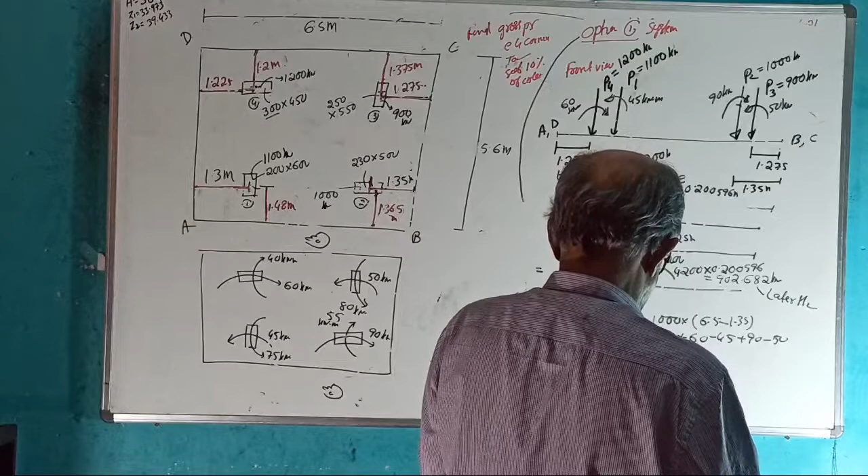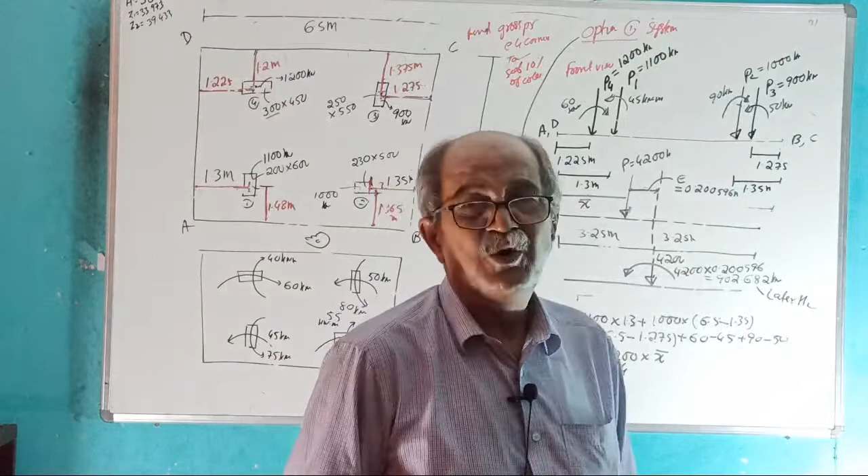Today, see, once again, same as yesterday. It was 100% charge at 5 o'clock. So, 100% means more heating was there, so I removed the charger. I thought around 7:30 I will put it on charging again. But what happened is, in the class, I forgot it. This is my mistake only. Next time I will be careful. For long classes, you once again remind me at around 7:30 or 8 o'clock. Just a comment, charging.

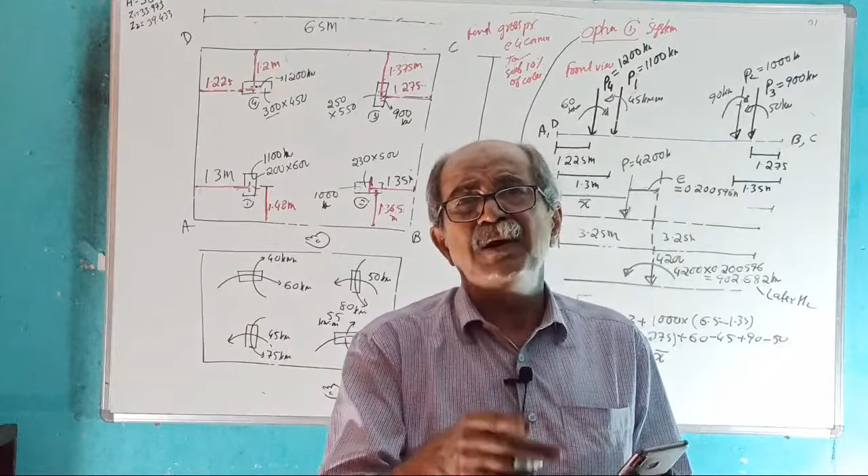For 2 hour classes, if 100 is there, no problem. This 4.5 hour class, usually after 2.5 or 3 hours, it becomes completely gone. Even I got frustrated today. Today's class I wanted in a single compact manner. Now broken. Those who are serious, they will see. Those who want gimmicks or show off, let them not see. No problem. Now continue.

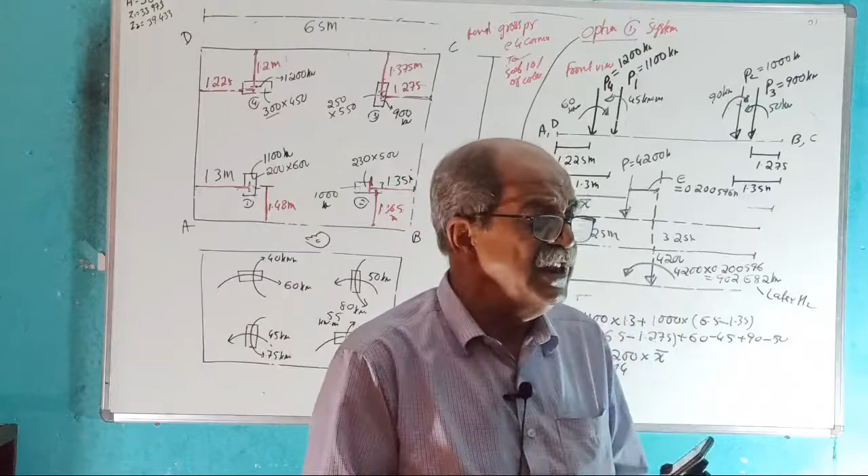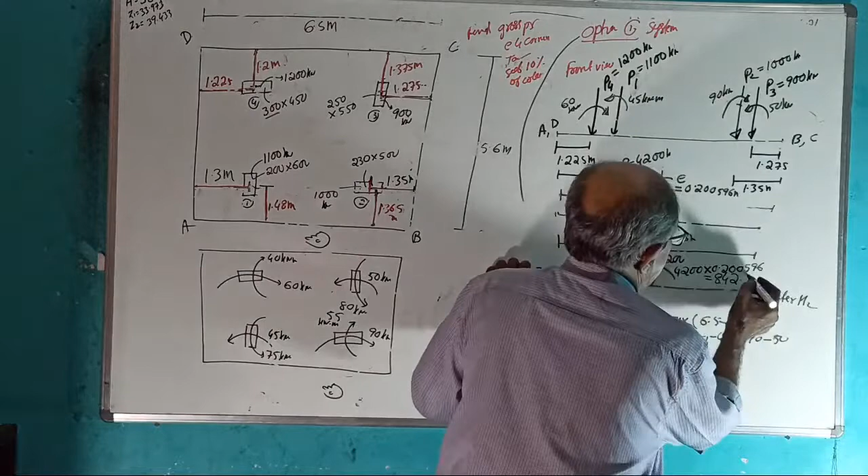So that number is, how you told wrong answer? No. It is how much? It is 842 point how much? 5032. Okay. 5032 is the answer. Later, M2. Fully clear? Fast. Is this fully clear? Fast, tell me.

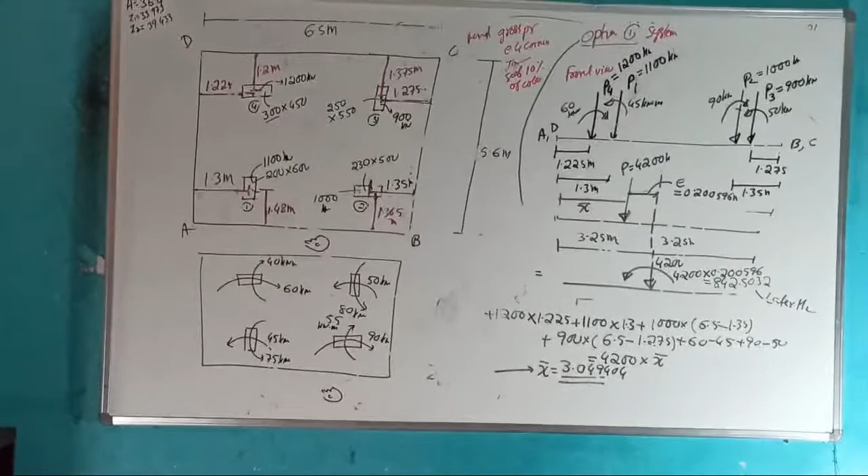Mic is off. Oh, yes. I have not plugged in the mic. Okay, no problem. I will put it. Sometimes it happens when you take the class, if you are serious about the subject. These things will not happen for a person who just takes classes mechanically. Those who are seriously involved in teaching, such things happen. Now, voice also okay now? Next time I will be careful. Now, mic is okay, voice is okay.

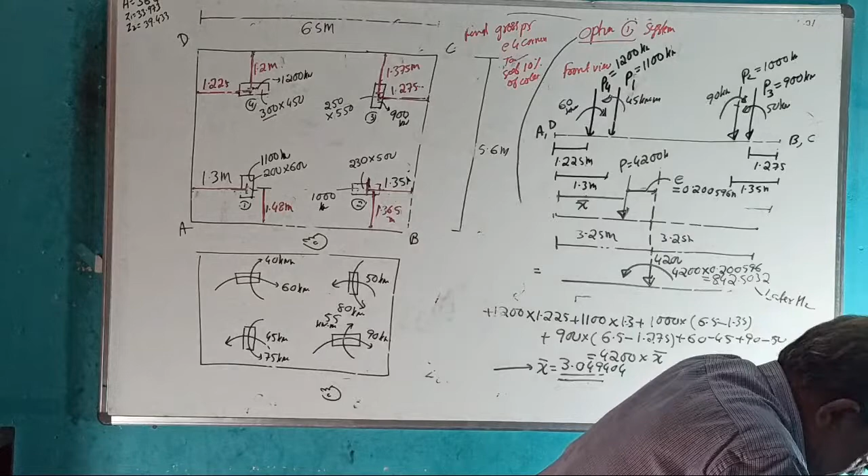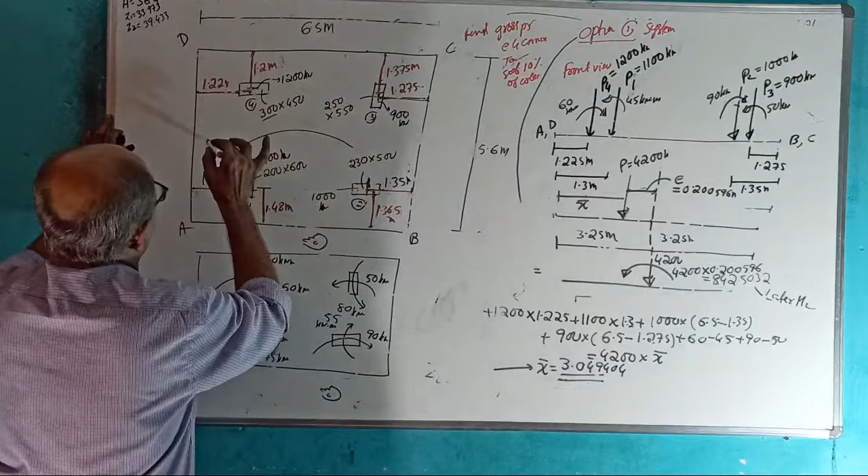Okay, start. Is this number correct now? Fast. I am rubbing this one now. Is that number 842.5032 correct? Okay, therefore remember, this M2 value is anti-clockwise 842.5032. Now option 1 is over. I will go to option 2 for lengthwise. Widthwise you try today. Today class will take a little more time. You should try and tell the answer. Those who are serious will try.

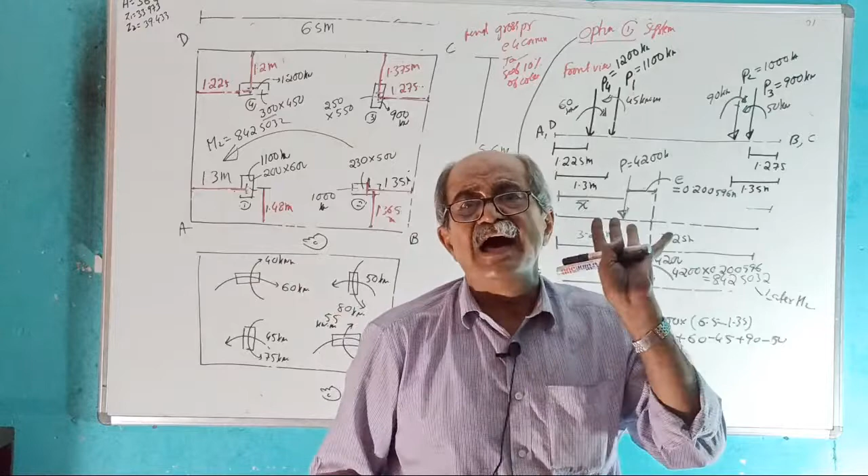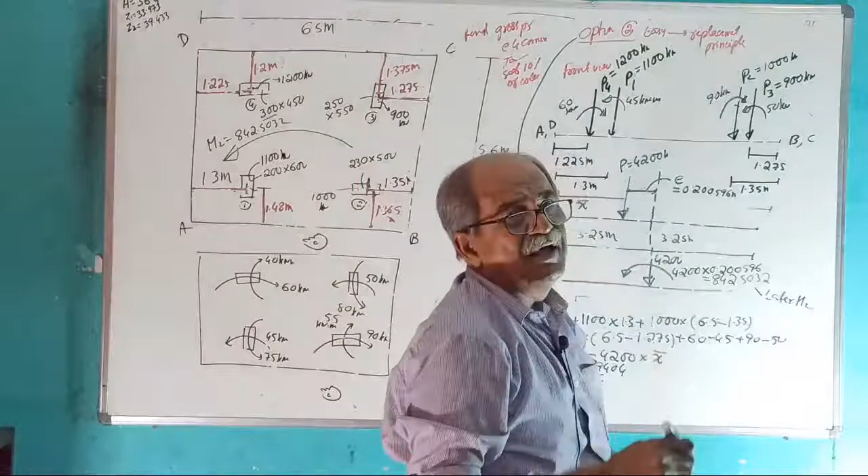Now, option 2. Option 1 is systematic; option 2 is very easy. Remember, option 2 is the replacement principle. Clear or not? For option 2 also the same sketch is required. You don't find X bar in option 2, nothing like that. In option 2, you first mark the same system, see from this side and write everything. This is the centroidal axis.

Now, replace this complete force system by a force P, and the moment we don't know, assume clockwise, moment M. Now it is called M, but later when you go to the footing pressure calculation, this M becomes M1 or M2. Directly all these black values are replaced by a single force P and M.

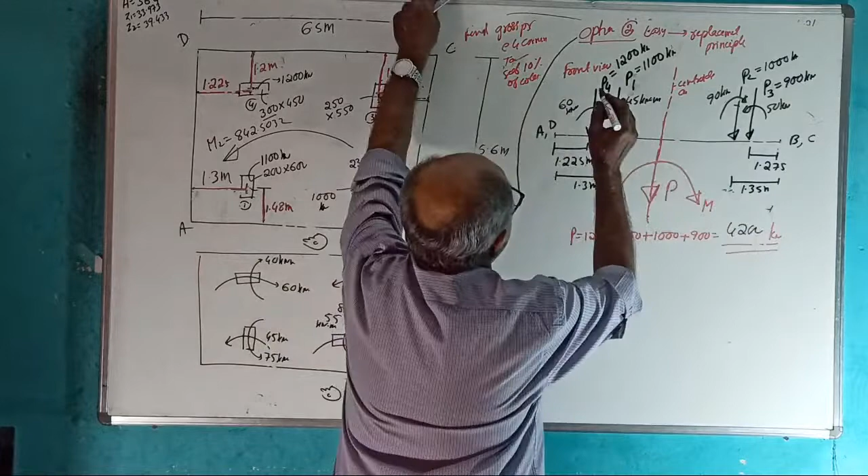Directly P equal to 1200 plus 1100 plus 1000 plus 900. Add all the loads, you get the total downward load, P equal to 4200. Now, each load is shifted here with the load and moment, or you find the moment of the complete system about this point. So, M is the algebraic sum of moments of the given force system about the centroidal axis. We will take clockwise positive.

M equal to 1200 into, before that, write what is this distance. If total length is 6.5 meter, half of length is 3.25 meter. Lengthwise I am doing. Widthwise I will take rest, but I will not stop the class. I will put the sketch and give around 10 minutes for you to do by both options. Now, moment about this point.

1200 into 3.25 minus 1.225, this load into this distance. It is anti-clockwise, so minus. Again, 1100 into 3.25 minus 1.3, also anti-clockwise. Then plus 1000 into 3.25 minus 1.35, that is clockwise. Again clockwise, 900 into 3.25 minus 1.275. These are the moments of the four loads when transferred to CG. Then directly plus 60, minus 45, plus 90, minus 50 will give the net answer.

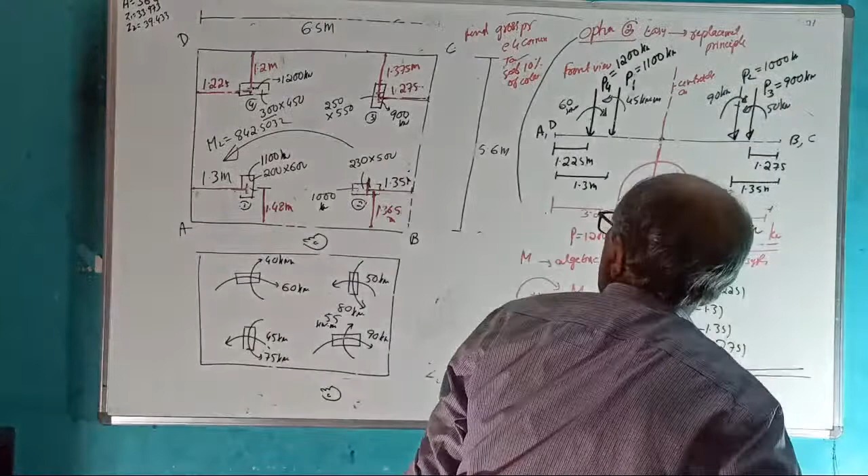Tell the answer. You have to get 842.5032. 1 paisa, 2 paisa difference, no problem, because of rounding off error.

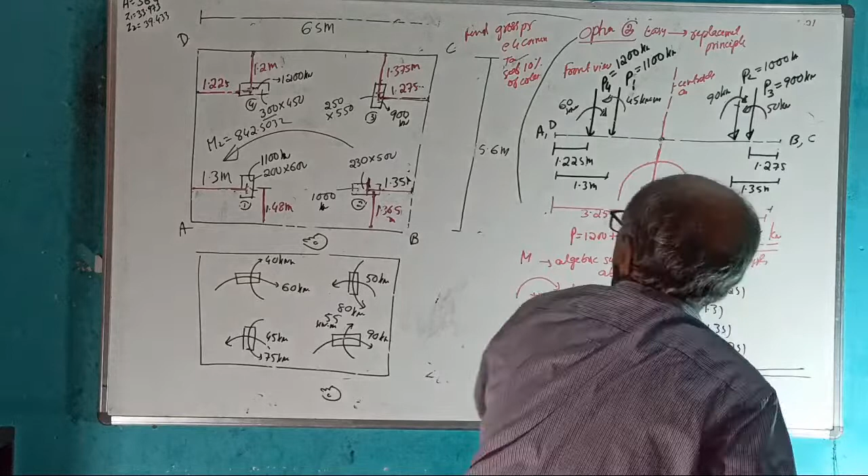Minus 842.5. Okay, thank you. Minus 842.5. We consider the net moment in clockwise. That means your M, which later will become M2, equals, with no sign, 842.5 kilonewton meter. Tell the direction. We summed up the moment in the clockwise sense. The answer came negative. It is not an equilibrium condition.

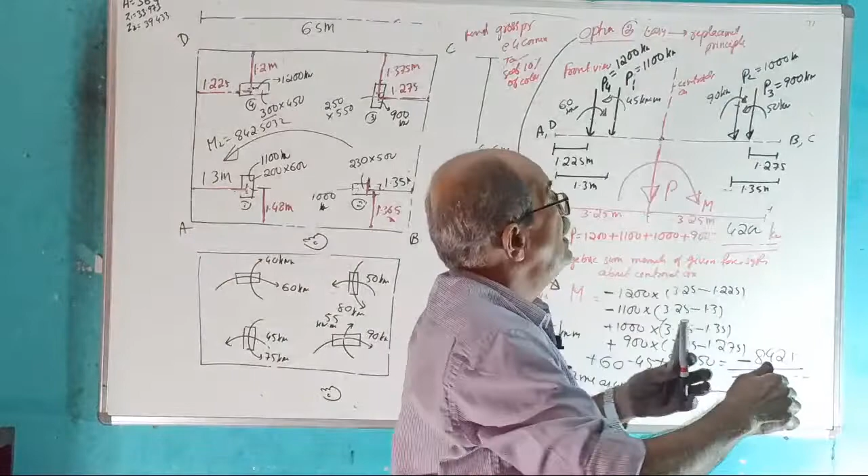What direction is summed up? Negative came. Means what? That much anti-clockwise is the moment. Same as what we got by basic approach? Tell yes or no, fast. Same as what we got by basic approach. Yes. Therefore, your P is 4200. Lengthwise moment is anti-clockwise, which we will call M2, and is 842.5 kilonewton meter. Fully clear?

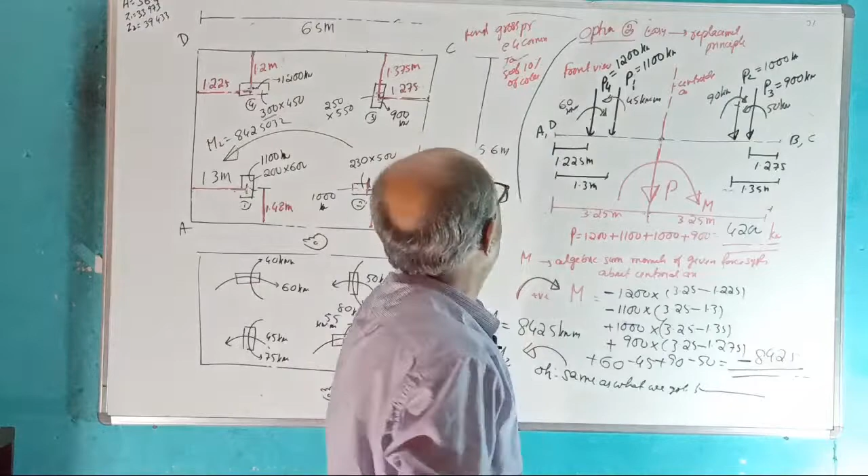Okay. Now start widthwise. Widthwise, now you go to side view. Remember, go to side view. How side view? Look from right side to left side, or look from this side. Very, very important, because if you look from this side, this is anti-clockwise. If you look from the other side, what does it become? Sometimes, when you change the side, the moment direction will change.

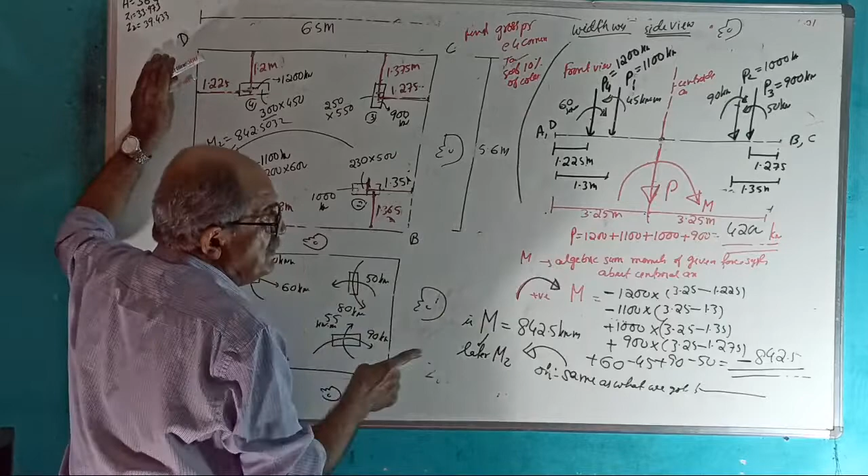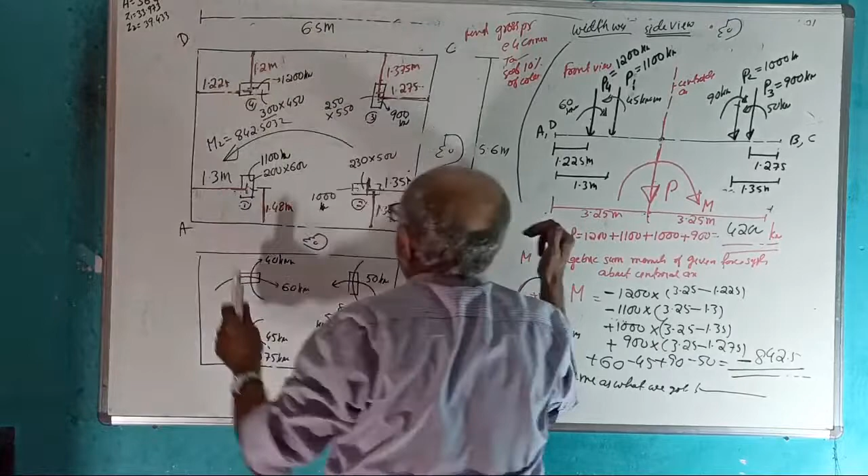Here it's okay. Lengthwise, widthwise change will come. When you see from here, this is anti-clockwise. See from the other side, it becomes clockwise. So see from this side. In ETABS and SAFE, I am calling it our side view. Our side view is always this way. Clear or not? So if I see from this side, put the same sketch. Are you seeing B on the left side or C on the left side? Tell me.

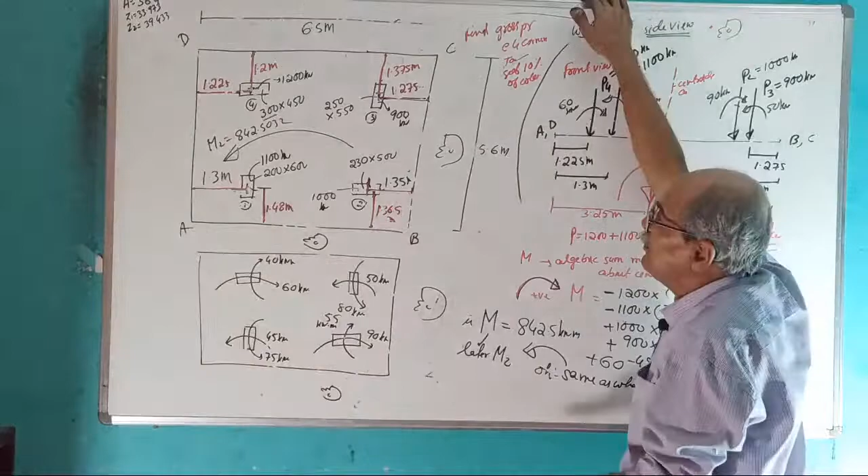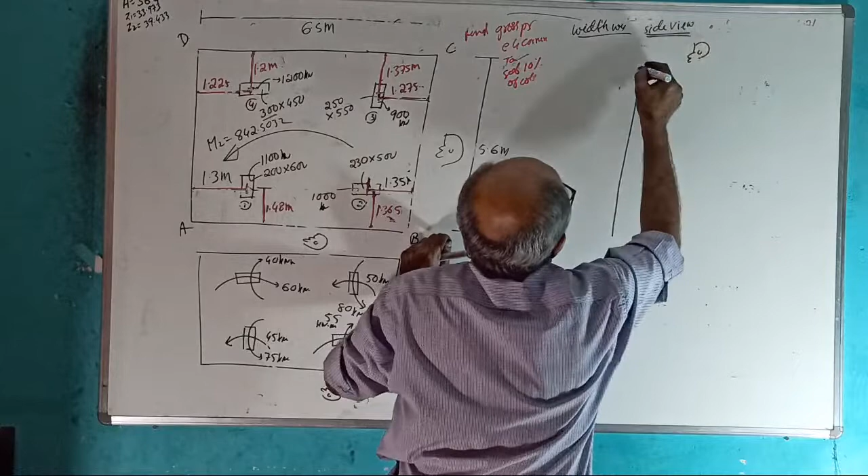Tell fast. Or you can turn the sketch also. Okay, that also will do. To avoid confusion, remember, we are going for side view. Side view you write here. Looking from this side, this is the length. Tell the total length fast. No space to write once again, you can write here only. Total length how much?

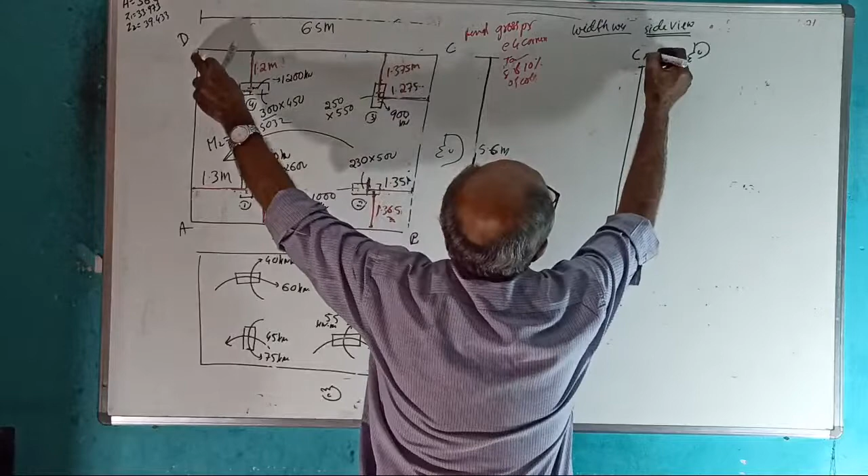5.6 meters. This point is B or A. Correct? This is the BA line. That is C up to D. Now see here. Column loads are vertical. The load will not become horizontal. Whether you see front view or side view, load is vertical. But now I have to write the load like this, because I am seeing from here. Leftmost, this is 1.48, this is 1.365.

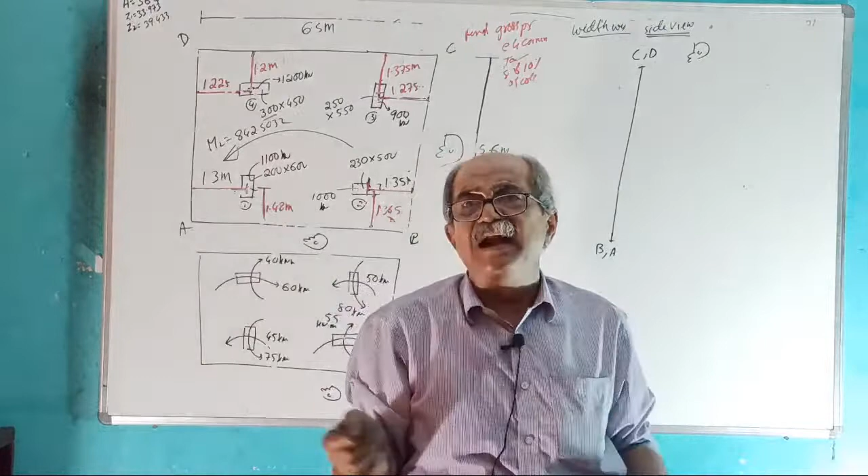Am I seeing P2 first or P1 first? If I look from this side, am I seeing P2 first or P1 first? P2. Earlier, with the help of my brother, I arranged this, using 4 bottles to show the columns. So you will see P2 first here. P2 equals 1000 kilonewton. And the distance from here to here is 1.365 meter.

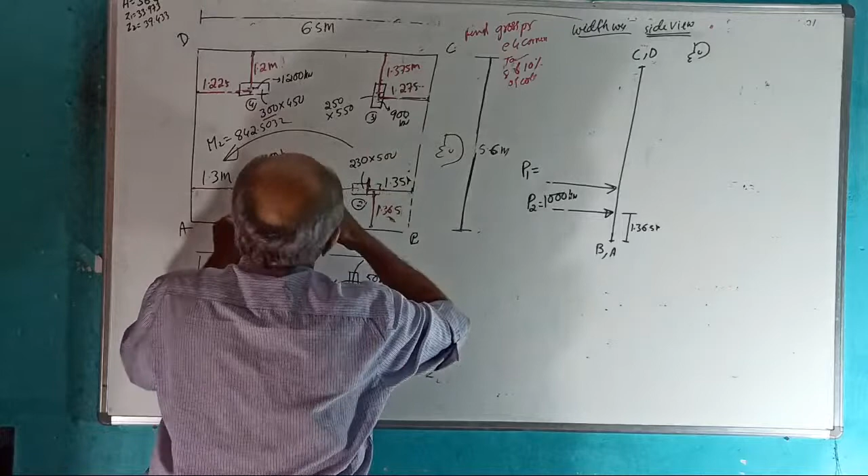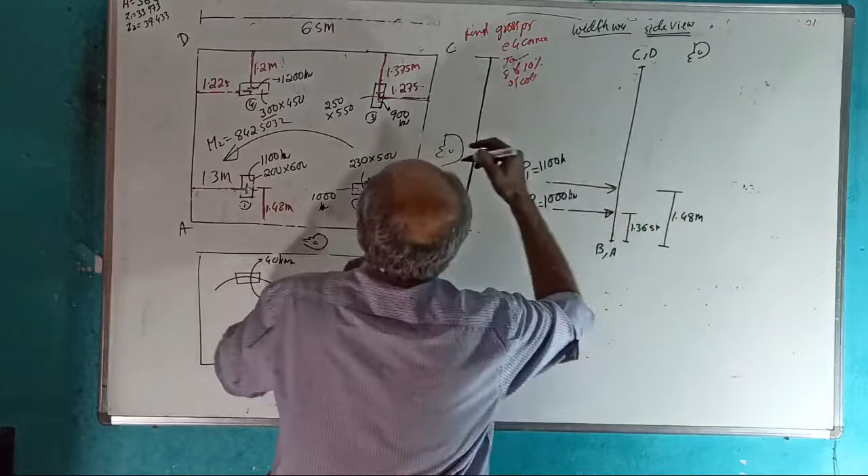Then a little further that side, you can see the second load. Scale is not required. That is your P1, slightly this side. How much is it? 1100 kilonewton. That distance from here is 1.48 meter. Then, from that side, which is first, P4 or P3? This is 1.2, this is 1.375. Which load is nearer here? P3 or P4? First, P4.

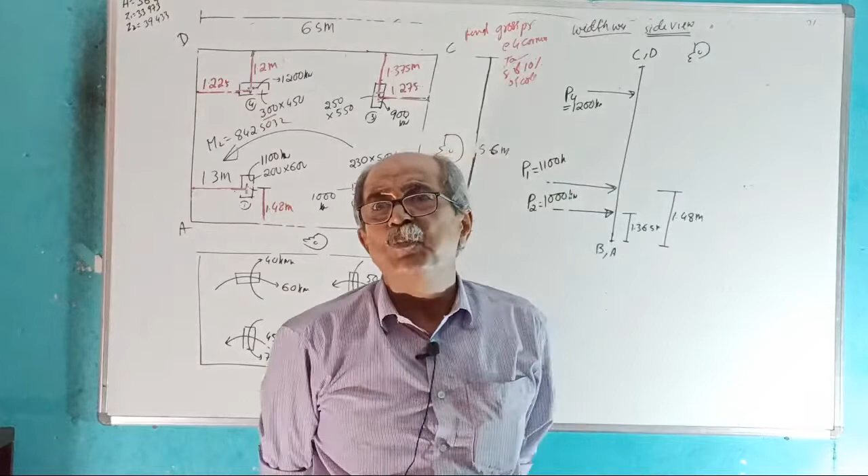P4 equals 1200 kilonewton. Even if you are not doing it by ETABS manually, at least if you know this, when the software gives the pressure, you know how it calculated it. Somebody who programmed it would have done all this calculation. Then we see P3 further this side. Scale is not required. This distance is 1.2 meter. This distance is 1.375 meter.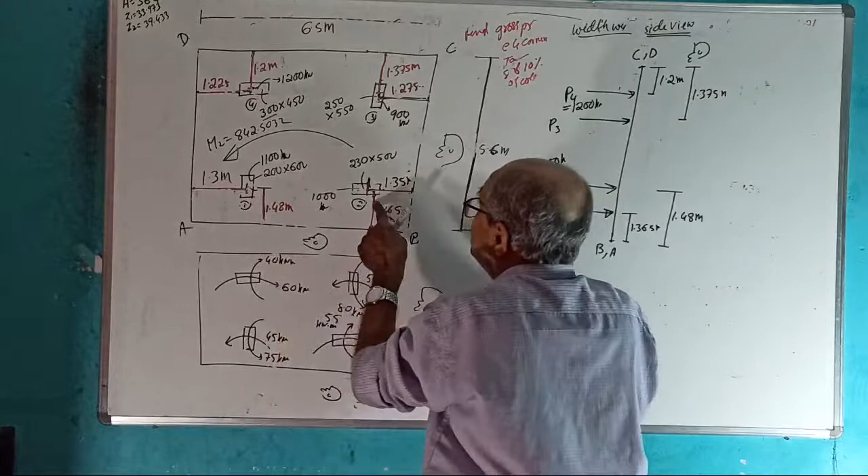Now see the widthwise moment. See here, P2 is here. Seeing from this side, it is clockwise 55. Clear? Seeing from this side, it is the P2 moment for the 1000 load. Correct? Yes, it is clockwise 55 kilonewton meter.

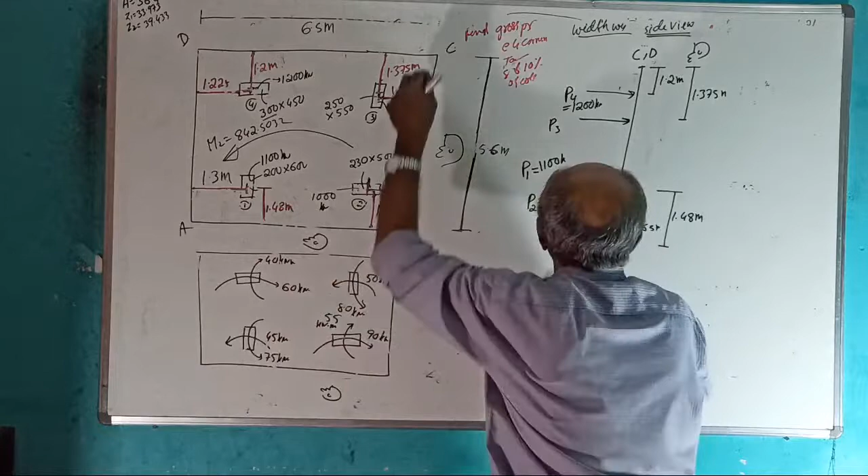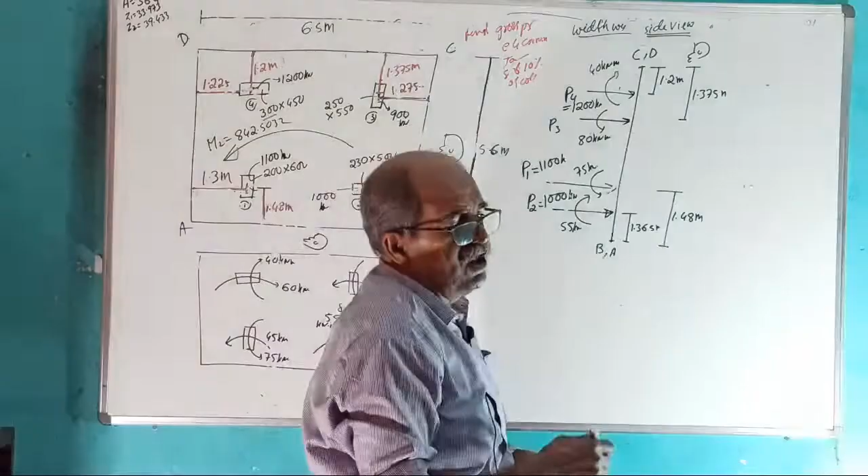And this column moment, seeing from this side, widthwise moment is anti-clockwise 75 kN meter. P4 column, if you look from this side, is clockwise 40 kilonewton meter. P3 column, if I look this way, it is anti-clockwise 80 kilonewton meter. Tell me, fully clear or not? Those who are serious, those who really want to learn the subject, clear.

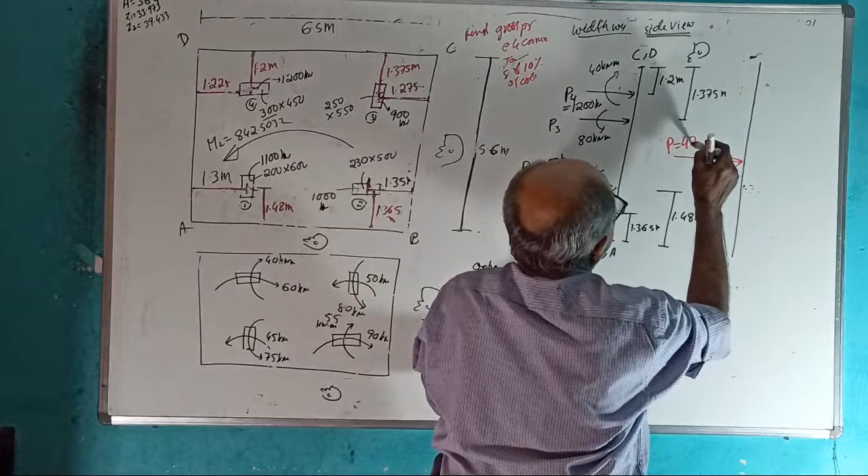Okay, start. First go for option 1. That is the basic approach. For all these loads there is a resultant load here, say P, you can put directly 4200. Why? Whether you see from this side or that side, load is same. And we don't know, from this side, it is acting at, say, X bar from here. Now go for Varignon's theorem. Take moment about this point, take clockwise positive.

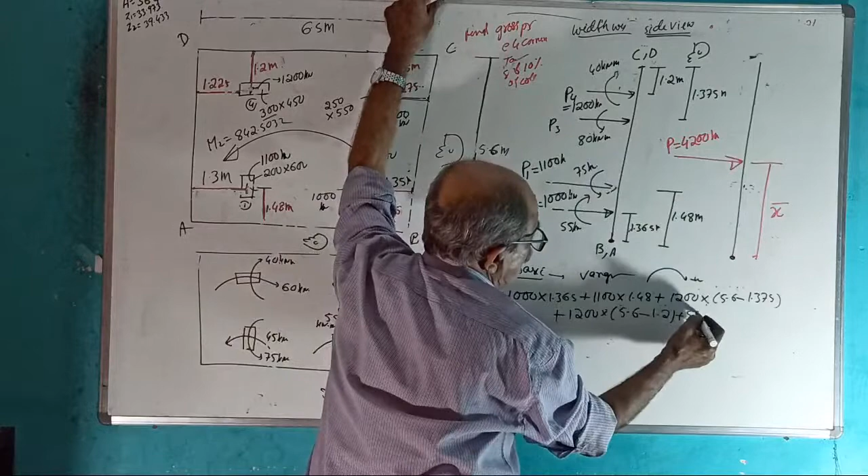Moment about this point is 1000 into 1.365 plus 1100 into 1.48, all clockwise, plus 1200 into half of length, 5.6 minus 1.375, plus 1200 into 5.6 minus 1.2, then clockwise 55, anti-clockwise 75, anti-clockwise 80 and clockwise 40. This is the algebraic sum of moments.

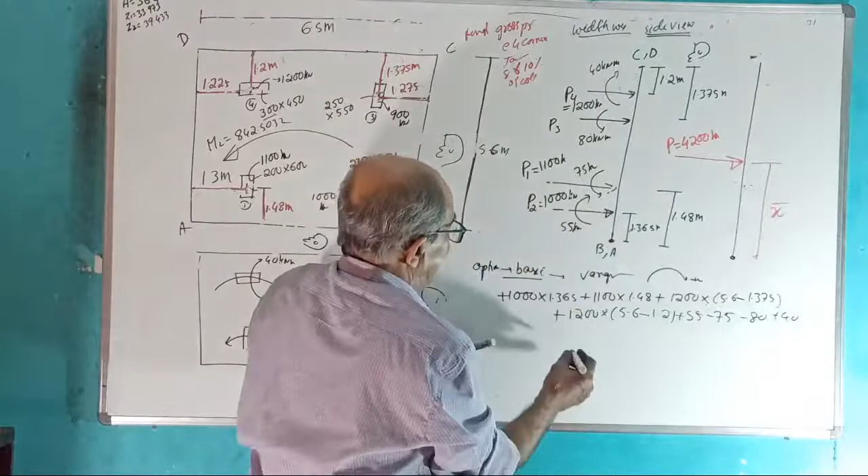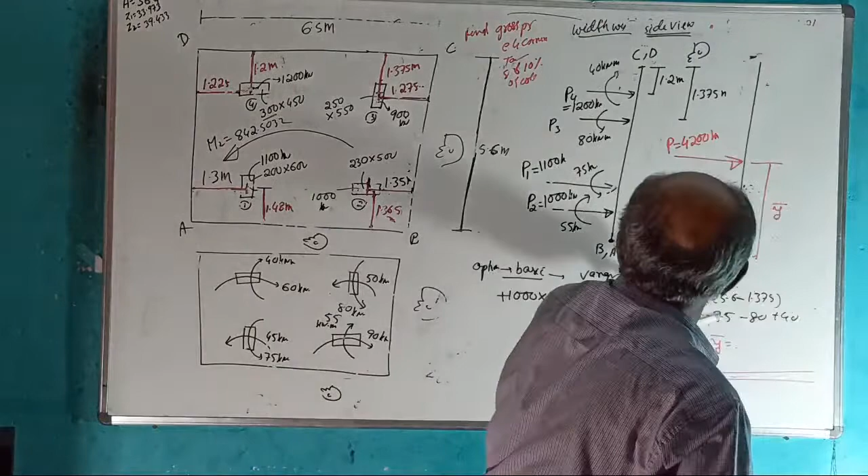This should be equal to resultant load P of 4200 into, sorry, not X bar, call it Y bar. Tell the answer. This will tell you Y bar. Full number, no rounding off. Take moment about this point, clockwise positive.

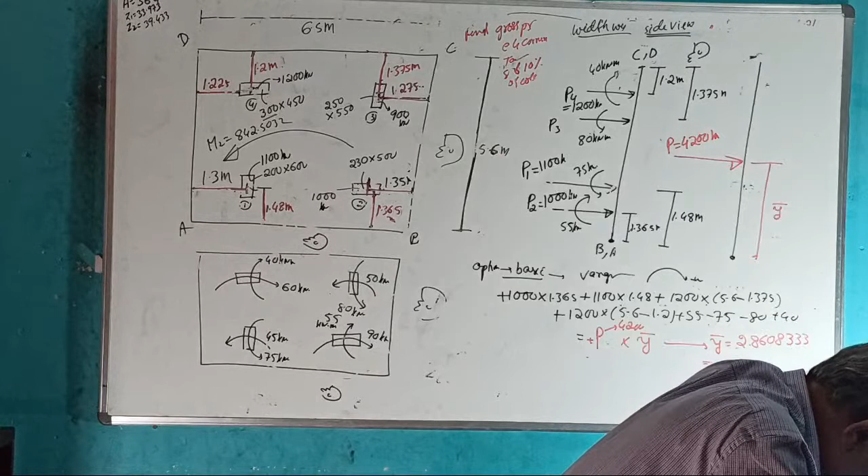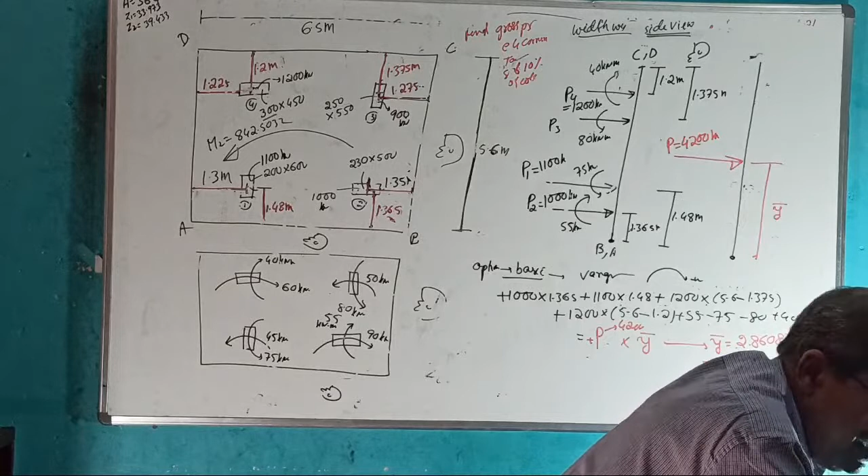2.8608. 333. But I can't depend on one person. At least one more person confirm it, so that I do not get a wrong value later. Even myself, if I calculate, I may make a mistake. If another person confirms it, we can proceed. Anyway, a final check is there. If the answer is not tallying, the only possibility is a calculation mistake, because wrong concept will not be told.

What about others? Somebody telling 3.162619. Now I have to calculate. 1000 into 1.365, plus 1100 into 1.48, plus 1200 into 5.6 minus 1.375, plus 1200 into 5.6 minus 1.2, then plus 55, minus 75, minus 80, plus 40, answer divided by 4200.

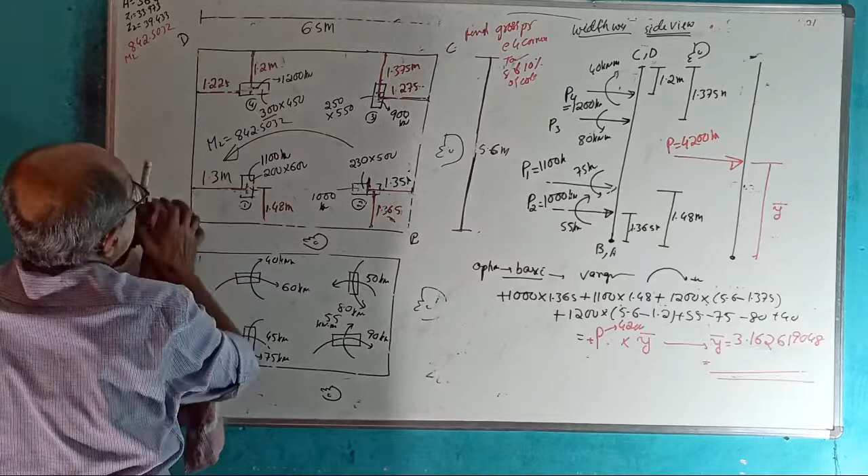It is 3.162. Yes, he is correct. The one who gave the second answer is correct. It is 3.162619048 meter. Now I can remove this one; I do not require any of the sketches. M1, I will tell you, or I will forget later: 842.5032. Now I can remove the complete sketch and continue here.

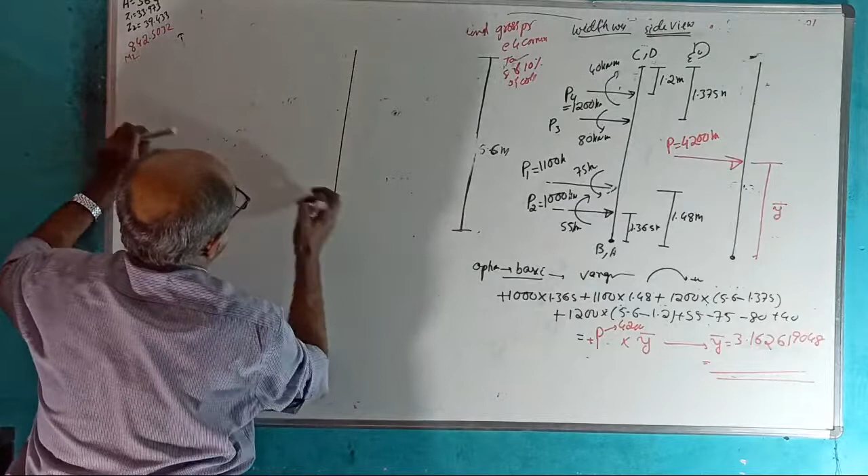If I draw the center line here, the centroidal axis, total 5.6, each side is 2.8 meter. Looking from this side, the load acts at 3.16, so it crosses the center. P is acting at y bar. This distance is called eccentricity e, equal to y bar minus 2.8, which gives 0.362619047.

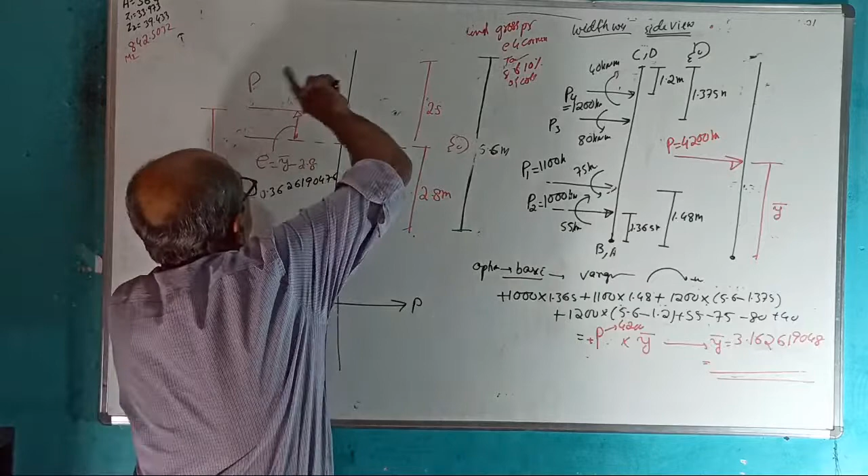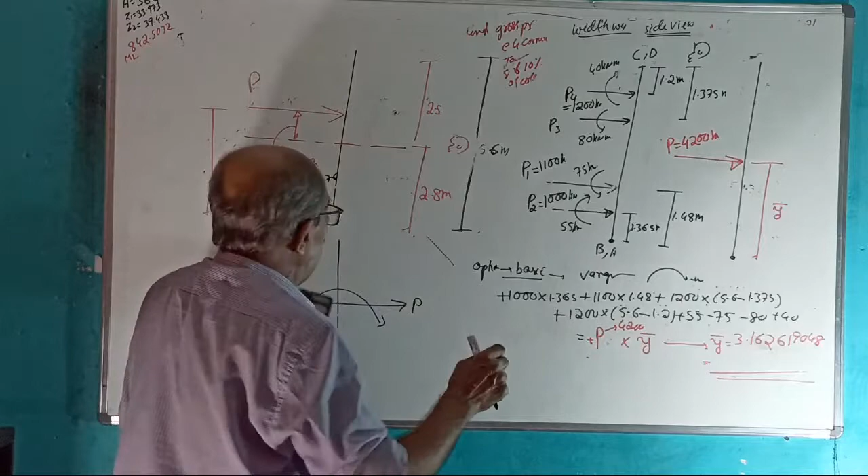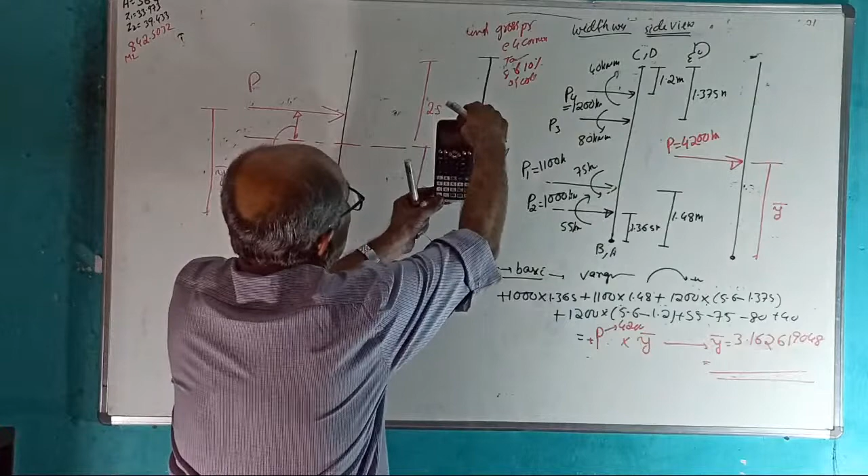Now this will be equal to an axial load P and a moment this way. Viewing from this side, clockwise or anti-clockwise? Even though you write it this way, when you turn the sketch it will become M1. So in the full plan, it is not your M2, it is M1.

Therefore a moment M, which later will become your M1 in the side view, equals P into eccentricity, whatever eccentricity you got, into load 4200, equal to 1523 kilonewton meter. Correct or wrong? Fast, tell me. 1523.

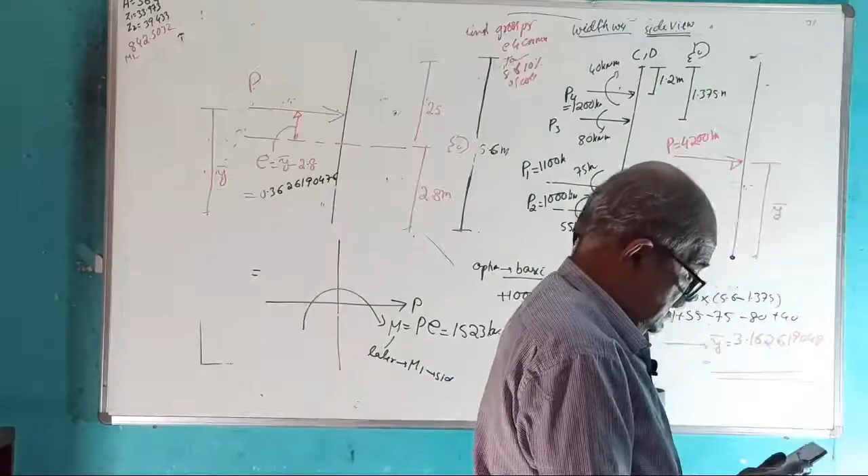You are not answering. Is 1523 correct? 1523, you are not answering. Any problem? I think no problem. I can hear my own voice. 1 minute. See? I can hear my own voice. I don't know whether it is yes, what yes.

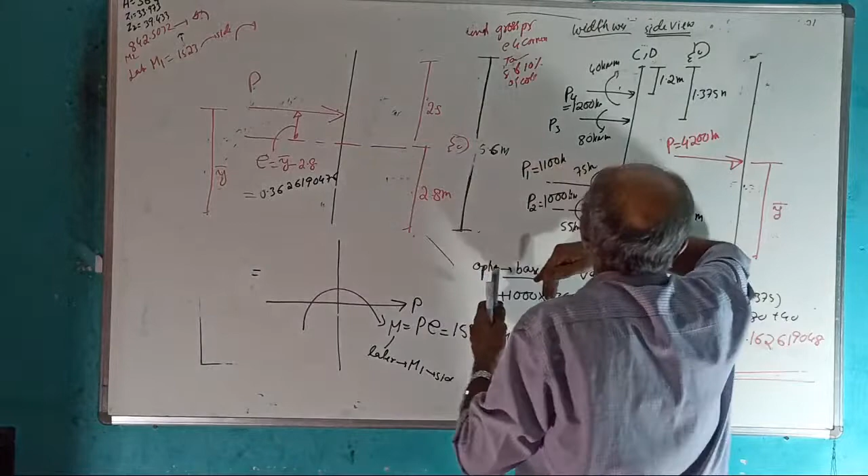Okay, leave it. Therefore, later, remember, your M1 equal to 1523, which in the side view will be clockwise. This M1 in the front view will be anti-clockwise. See, in the side view, that moment is like this. Even if you write this way, no problem, you can make out. This is your M1. Okay, this is over.

Now do one thing. Go for easy approach. Easy approach means replacement theory. What you do? Correctly mark the centroidal axis. Then each distance is how much? Total 5.6 means 2.8 and 2.8 meter. Complete force system replaced by a force P and assume that moment is clockwise M. This M later becomes M1.

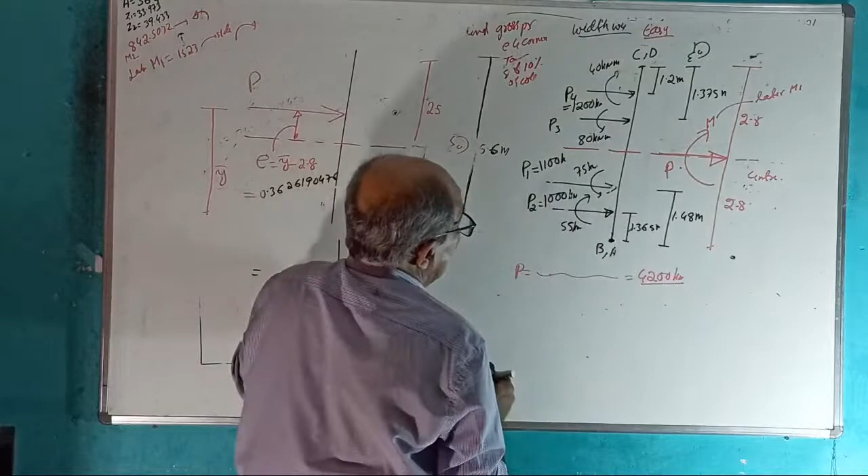Okay, start. I only will do it. Why unnecessary homework? Let me finish everything. I will remove this one now. Now, your P equal to, waste of time calculating, 4200 kilonewton. And your assumed M in clockwise direction, later becomes M1, is take moment about this point.

See here, anti-clockwise of 1000 into 2.8 minus 1.365. Then once again anti-clockwise of 1100 into 2.8 minus 1.48. Then clockwise of 1200 into 2.8 minus 1.375. One more clockwise of 1000.

Load what is this? Oh boy, I don't know which load is where. See, I somehow rubbed it. 1000, 1100, 1000. What is the P3 value? By chance, if any load is interchanged, I am helpless. Then you should rectify it and do it. Agreed? One load is missing here. I have not entered the load. How much P3, tell me?

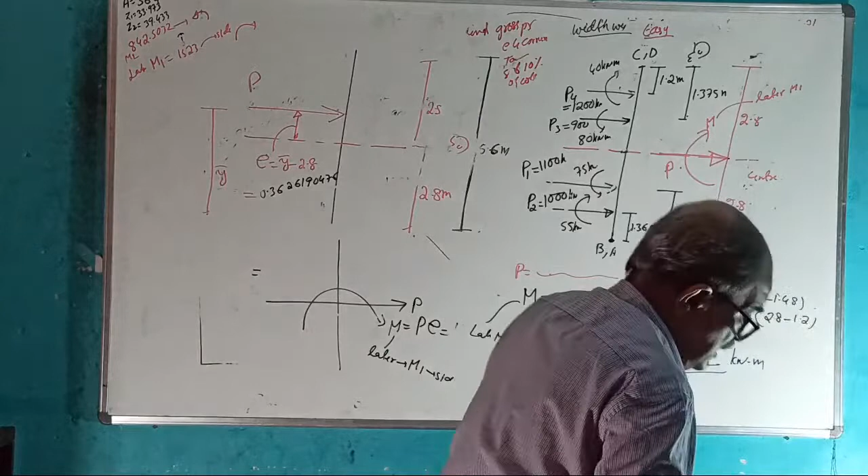1.275? Oh, now you tell. You should have told me earlier. If this is 1.275, it is too late now. Sorry. Now who will do all the calculation once again? I told you, any mistake is there, you should tell earlier. I cannot go back and change everything now. That means you are not alert. Someone told 1.275 correct.

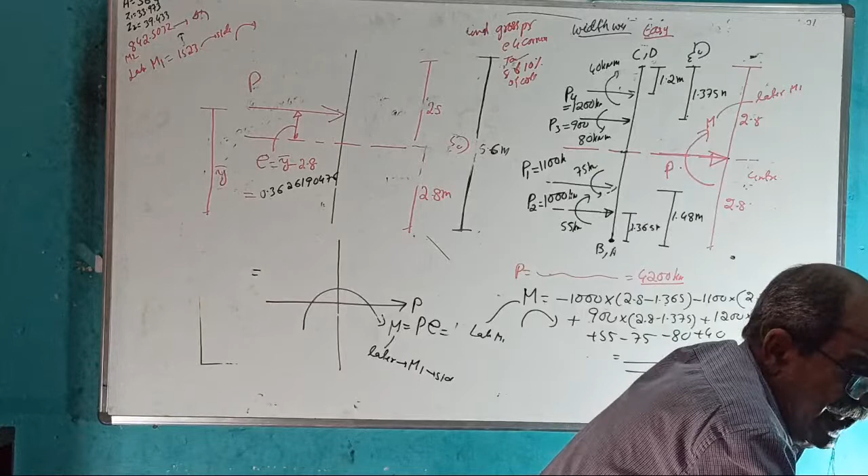Tell what moment you are getting. Okay, I will check it now. Tell me first what moment you are getting here. I will check the answer later and give correction if requirement is there. These all you should tell me earlier. I cannot see that 900. I was wondering, without that 900 writing, how I put y bar? But for the present step, you tell the answer.

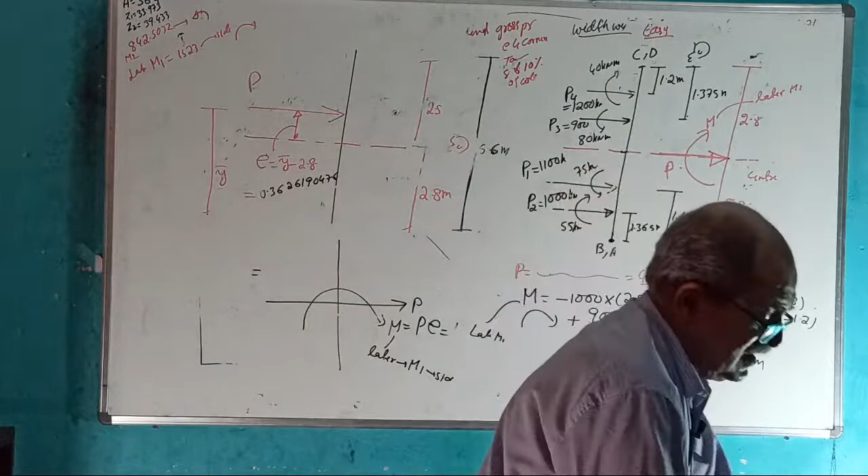I told you, only chance of mistake in my class is wrong entry of numbers, skipping some numbers, or print mistake. No technical mistake. You are not telling the number here, you are wasting time. I asked you how much is this value. Then I can make out where is the mistake.

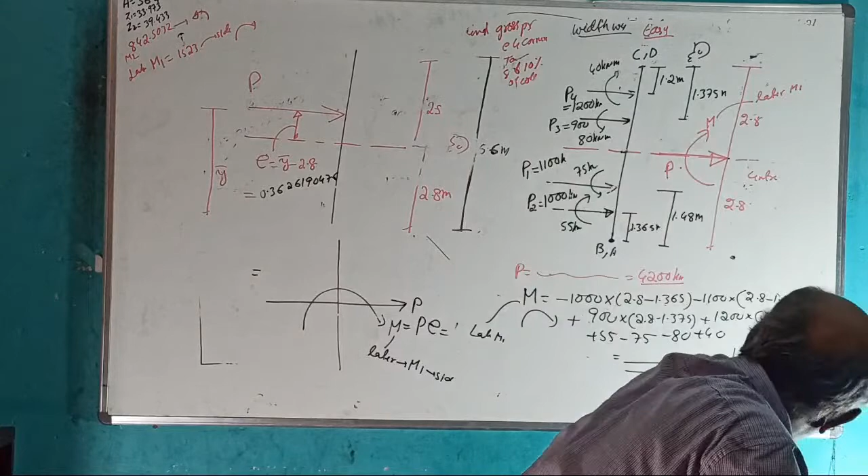255.5. Okay. Sign plus or minus - plus, okay, 255.5 kilonewton meter.

Make a note. Earlier by basic approach we got 1523. Therefore, no need of getting panic. There is some calculation mistake. We will do one thing now, we will revise it.

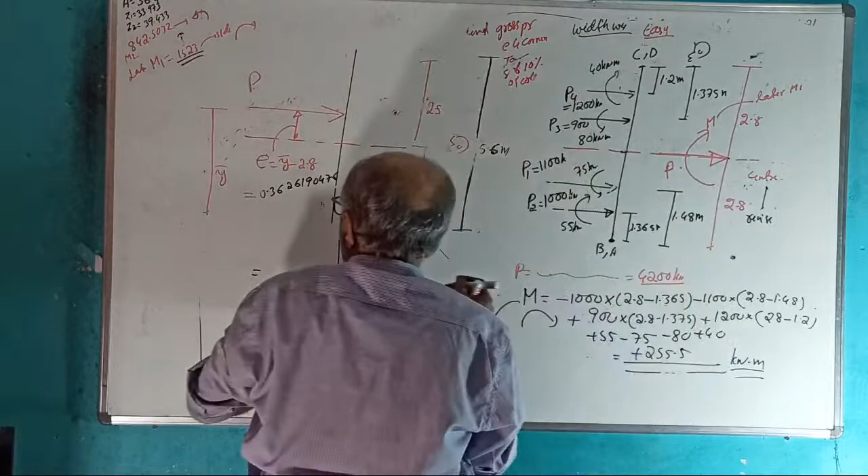See, revise. Revised Y bar - I will calculate and dictate as I tell you. Once again correct it.

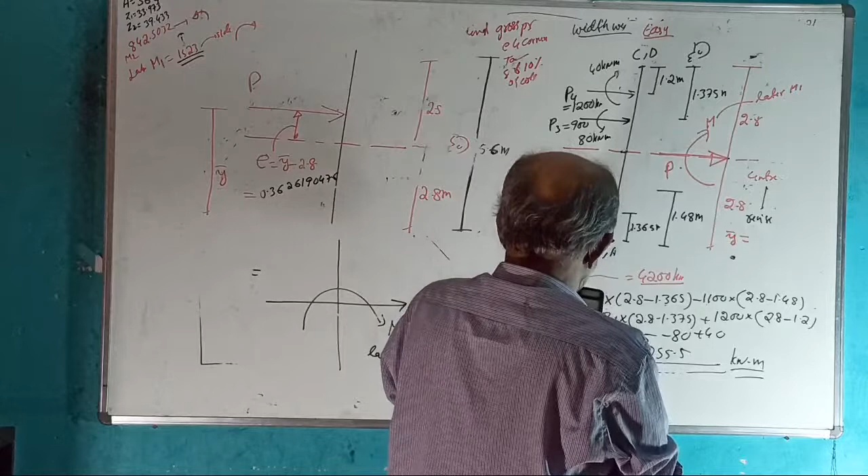1000 into 1.365 - I am correcting the previous option, that is basic approach. Plus 1100 into 1.48, plus 900 into 5.6, minus 1.375, plus 1200 into, correct it now, bracket 5.6 minus 1.2, then plus 55 minus 75 minus 80 plus 40. That answer divided by 4200.

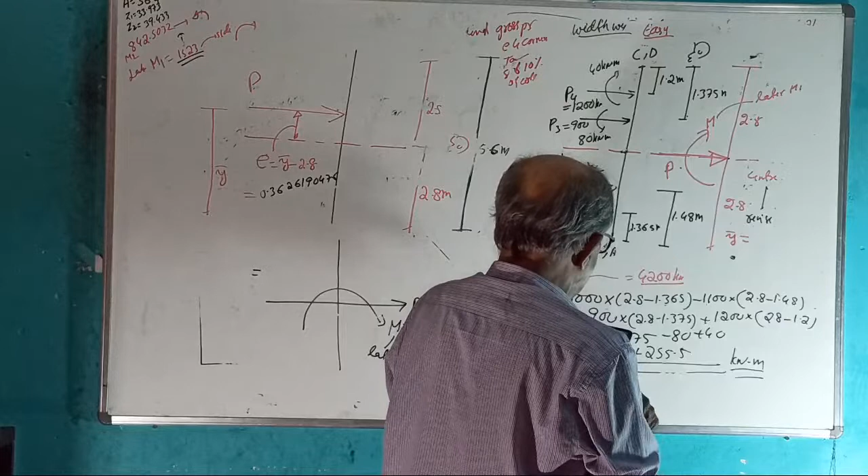Y bar is wrong. It is 2.86083333 meter. Okay, now with that value, if I change here, this will become E, E will become minus 2.8.

Your E will become 0.06083333. With that value, your M will become P into E, 4200 into E. It is directly clockwise here. Tell the answer - 4200 into this number, tell the answer.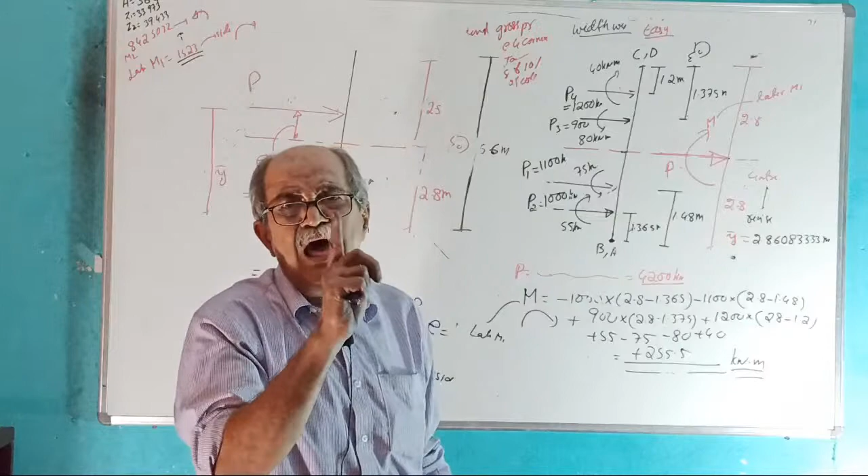Remember, it is my class. My class, only one answer. Different answer cannot come in my class.

That too in engineering mechanics, strength of materials, structural analysis, matrix method, finite element method, etc. - different answer cannot come. In design problems, so many times rounding up or approximation is there.

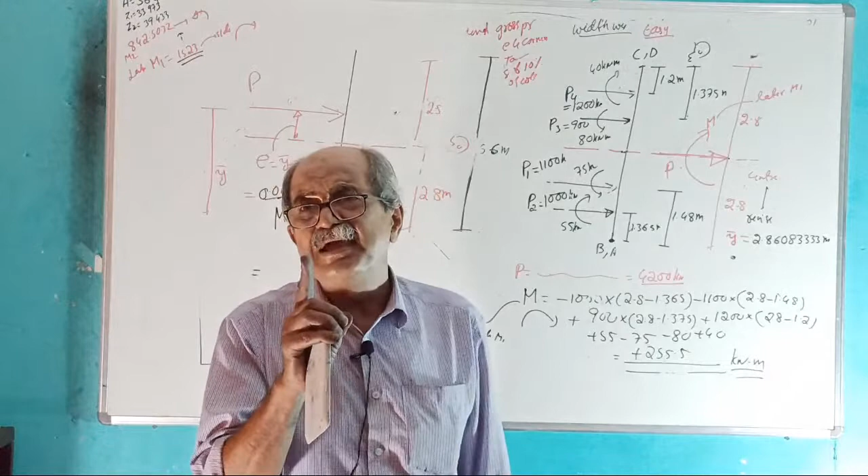See, RCC - some people take Xmax by D as 0.48, some take 0.479, center of gravity I take 0.42 XU, SP16 takes 0.416 XU, and I take Fy by 1.15 as 0.87. So in RCC or steel or any design problem, slight fluctuation is possible, no problem - why, it is practical oriented. But in a basic subject, two answers can never come.

Two answers can never come. It is plus - no plus here, plus illa.

255.5, 255.5 - oh see, same answer, right? Therefore, conclusion now.

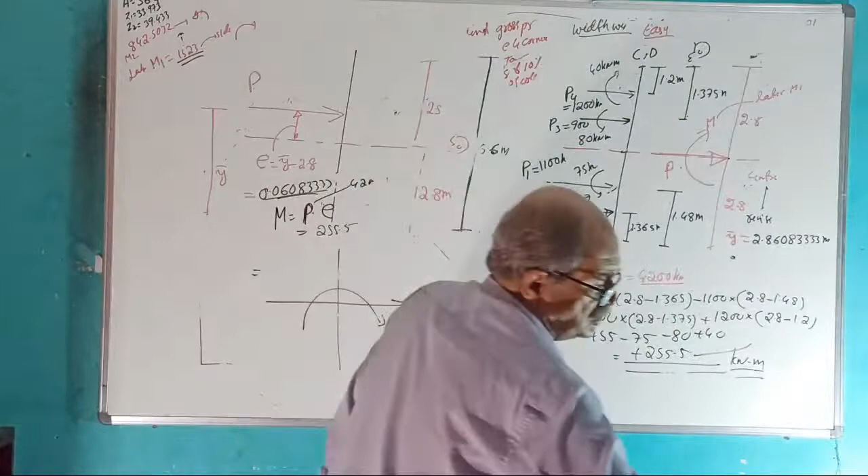If you see, now do one thing - imagine it is an isolated footing. Clear now? Now forget that it is a combined footing or raft footing or isolated footing. You got a footing in contact with the soil. Upper side, whatever happens, we are not bothered - we want contact with the soil.

Your L1 equal to 6.5 meter. Your L2 equal to...

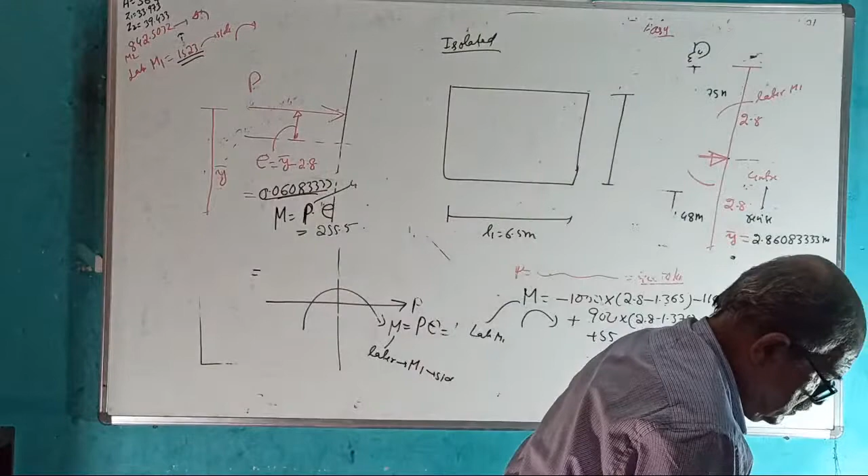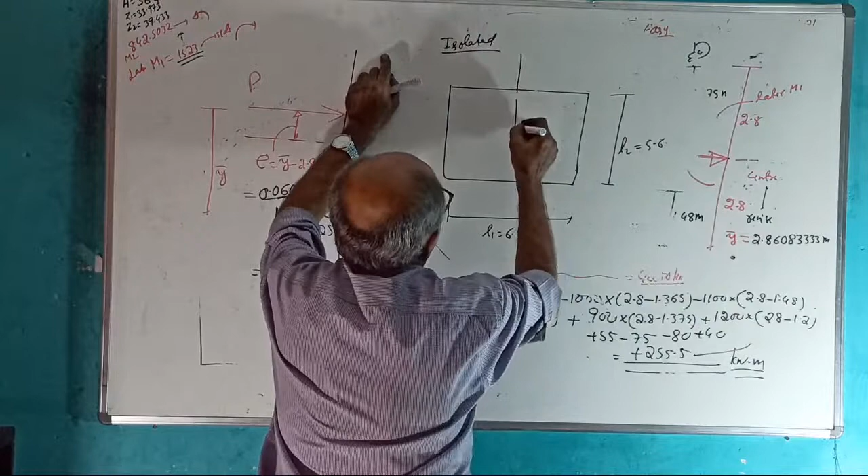L2 equal to, I forgot - 5.6 meter. And this is your axis 1, this is your axis 2, this is your axis 1.

There is an axial load P. One moment lengthwise we got, anti-clockwise, that is called M2. M2 equal to we got 842.5 kilonewton meter. One moment from widthwise, from here it is this way, clockwise, M1 of 255.5 kilonewton meter.

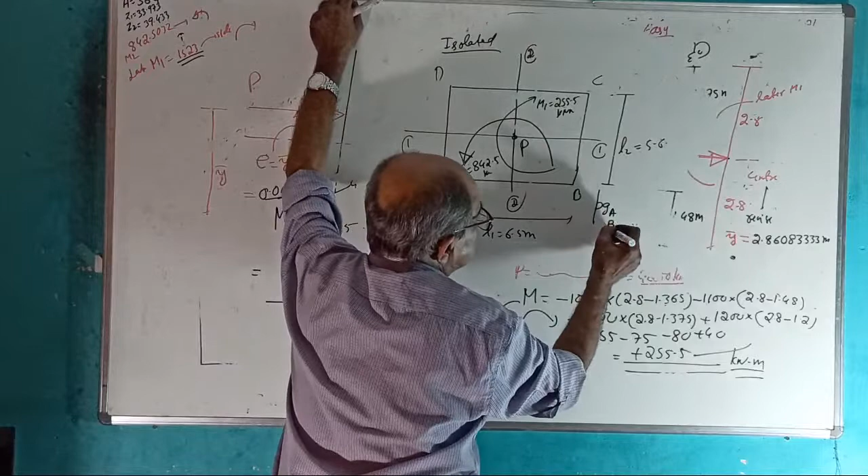Now, A, B, C, D - can you calculate the gross pressure at A, gross pressure at B, C and D? Just tell me, can you calculate or not?

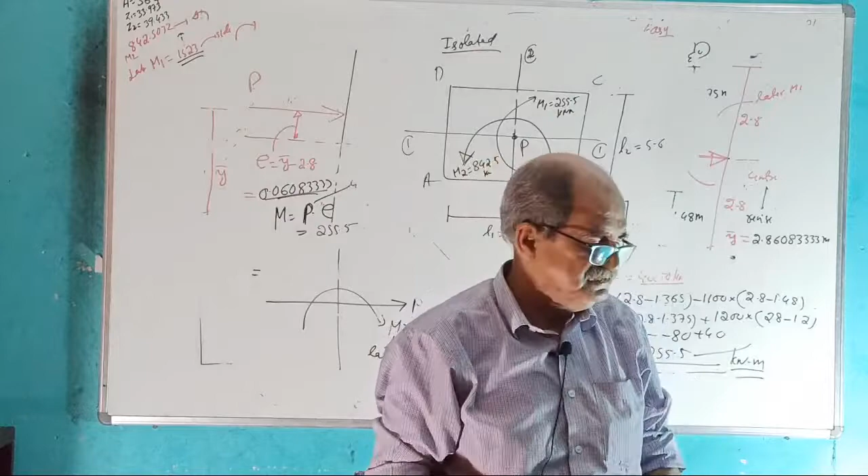If you tell yes, I will close the class. I do not want the answer. Now, can you calculate the gross pressure at the four corners? Tell fast.

Okay, sorry, your answer is correct. See, Sridhar Murthy told earlier, correct - you have taken 900, we took a wrong load.

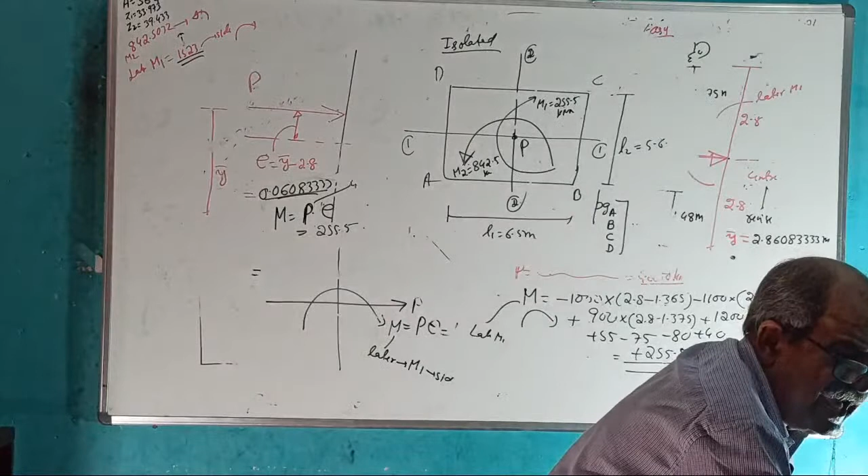See, I never get panic in my class if the answer is not tallying. If answer is not tallying, I enjoy - I know there is some mistake, I will find out the mistake. So far, I never got trapped by such a value, getting stuck in class worrying what to do. It never happened, and it will not happen in future also.

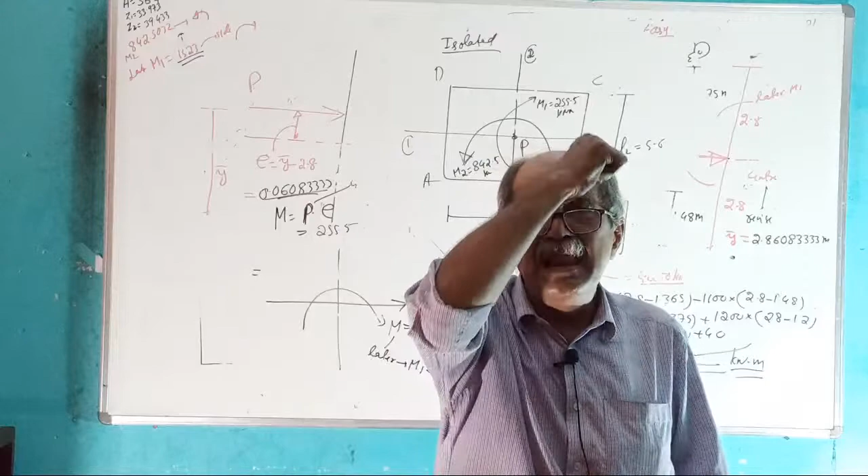Okay, you calculate the pressure at the four corners, and maximum pressure should not exceed SBC, minimum pressure should not be negative. That is the condition for isolated footing or combined footing of 2 columns or 4 columns. So for any number of columns, for pressure calculation, just P, M1, M2.

Just tell me, clear or not? For pressure calculation, P, M1, M2, that's all. If multiple columns are there, take resultant M1, resultant M2.